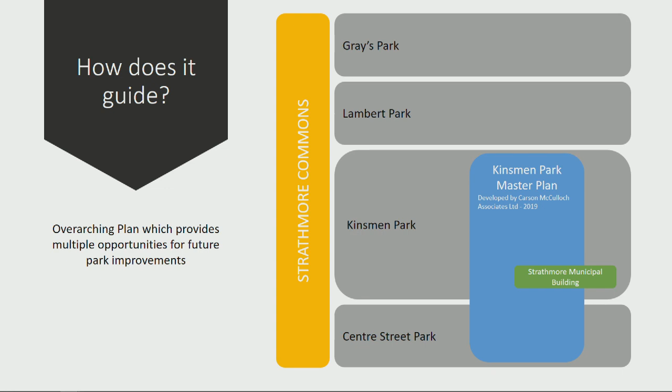So how does it guide us? This overall plan includes Grays Park, Lambert Park, Kinsmen Park, and for now we'll refer to it as Centre Street Park. Within that, we've done our Kinsmen Park Master Plan, completed earlier this year and late last year, which includes Kinsmen Park and what I refer to as Centre Street Park. A small portion of that is also our new municipal building, which is under construction.

So what we're looking to do through the rest of 2019 and 2020 is 5 different phases. One is the Thomas Drive pedestrian bridge. One is pathway projects related to Strathmore Commons. One is the transition zone between our new municipal building and the current park. One is enhancements to the playground in Kinsmen Park, and one is maintenance work or enhancements to the existing spray park.

The Thomas Drive pedestrian bridge - we've already got this item out for tender. We've used Lex 3 Engineering, who specialize in bridges, as well as Sedulous, who we've used on previous projects, to continue our relationship with the WID. This will be located at Thomas Drive and Centennial Drive. We already have the gravel pathway along the south side of our storm pond that goes right to that point, so we'll connect there.

In the next phase, we've got more pathways that'll go from this bridge further south. Construction is restricted to fall and winter of 2019, to align with WID requirements for working when there's no water in the canal. Tender closes tomorrow, and then we'll know where we sit related to our budget and what the cost will be.

For the pathways project, where this bridge will go on the west side of the canal, we'll do a pathway all the way down to Park Lane Drive. Another is the Lambert Park Pathway, which came from concerns from Lambert residents - they've had people cutting through their property to go towards the library, so they've asked for a formalized pathway to help reduce that concern. We've included for that.

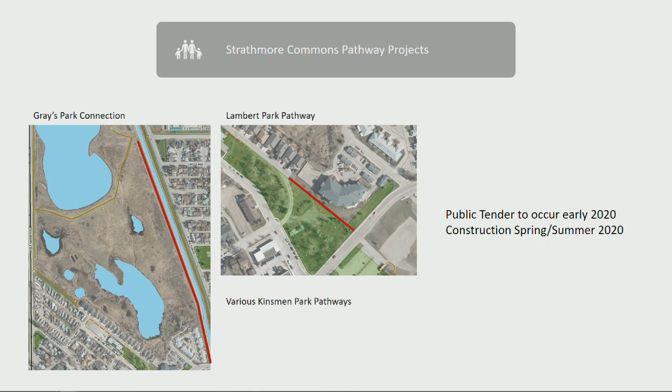Everything in the master plan is just that - it's a guiding document, not set in stone. We have the flexibility to change things, move locations if we see fit. This is just the recommendation.

Playground enhancements - we're going to coordinate this project with operations. They've got connections, they do enhancements to playgrounds every year, so they know the people to talk to and the rough cost of what it should be. We're going to look at a design build for this one, because it's a specialized thing and we might as well use the experts and their opinions.

This one will be constructed in 2020, but we're going to look to tender this as soon as possible to try and get the best price. Understanding from the operations department, the longer you wait, the less likelihood you are to get either competitive pricing or any pricing at all.

We haven't quite decided what to do here, but we are looking at possibly additional equipment, a new play surface, and some adjustments to the landscape around the playground.

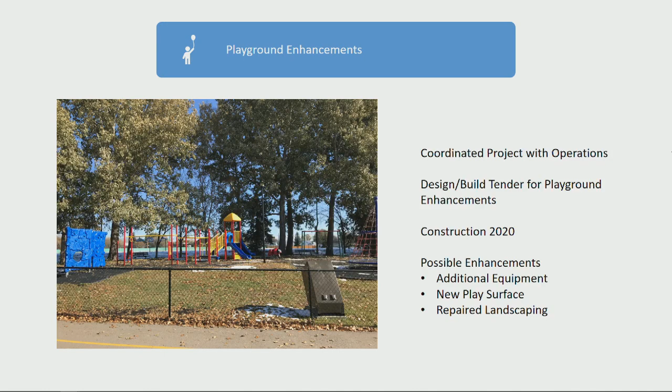And then the last one is the spray park maintenance - this again would be coordinated with operations. Our original thought was mechanical things, just get it working again. But the more we worked with operations, we understand it works good, it doesn't have issues. We don't need to spend the money to enhance it - that's part of their regular maintenance that doesn't need a big capital spend.

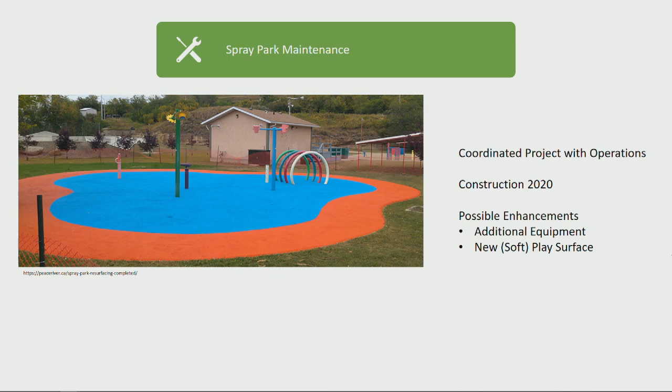So what we're looking at is either additional equipment or maybe a new soft play surface. The reason we're looking at the new soft play surface is there are options for grants - it's recycled rubber, that sort of thing. So anywhere we can get help or more funding, we're all for that.

To go along with this, of course, we've got risks. Main one being our budget - it's always a fixed item that cannot change. So as we get things tendered, we will work within our budget. We've got approximate costs for everything, but until we know hard costs, we'll work within that number.

Public disturbances - we know already with our municipal building there are concerns of residents. We're working in this area a lot, and we're also going to work in other areas. So keeping the public informed is a big one.

Contaminated soils - this is well known in the Kinsmen Park area because of what used to be there. So that does have a cost associated with it. We do have a good idea of what that will cost, but again, that's one where until you dig it up, you don't know.

Schedule - we are looking to get as much done as early as possible. The goal is to be done by fall 2020. So that is a very limited summer construction schedule, but we do have the opportunity to do a bunch of this stuff throughout the winter months.

And then the last risk is public expectations. We are a town, we are spending public money, so we want to make sure that we are getting good value, that we're diligent on what we're spending, and that we're meeting the expectations of the public.

Stakeholder engagement - so we do want to keep people informed, we want to keep people involved, and we're going to try and do this through different forms.

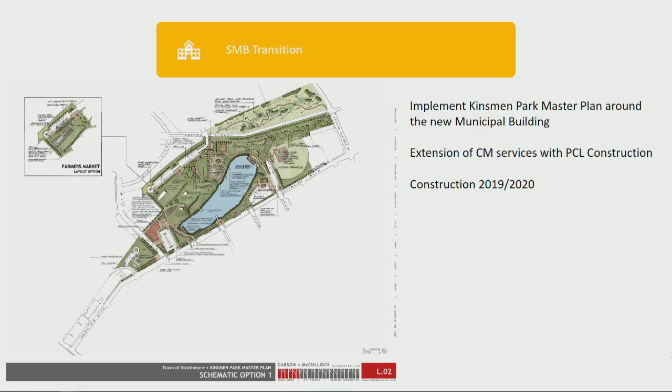Under the public expectations process, this is a public expectation. It was a public expectation when this council spent $175,000 on that farmer's market. The expectation of our community, and the people we entice downtown from their nice, warm, year-round area to come downtown and enhance it, just like the same reason for our municipal building, was that this would sooner rather than later become a closed-in building, with power and access to water.

So I think that is something you're going to get a lot of backlash from the community about. We are adding water, that is already planned, but the fact that you have an open-sided building is going to be a huge problem. And it was certainly at the time when we did that, and we were also talking about upgrades to the playground and spray park, a priority over both of those things. I don't know if council would agree with me or not, but that certainly was in my purview and my understanding when we enticed that group from the Ag Society. I wouldn't want them to think that was done under false pretense.

My other question is around council getting weekly updates, but what about our website? I know we've talked about that. Our mayor has been eloquent in speaking to the need for absolute visibility in terms of this project, timelines, updates, and financials, and having those available to the community.

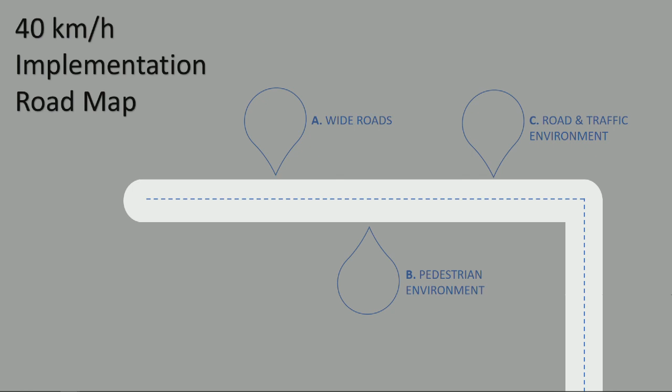From here, we looked at our 40-kilometer-an-hour implementation criteria. Step A deals with wide roads, B deals with the pedestrian environment, and C deals with the road and traffic environment. A states pavement width equal to or more than 10.5 meters, where the operating speed's 85th percentile is equal to or less than 50 kilometers an hour. The width along Centre Street is 12 meters, which meant we had to put up our armadillo, our traffic counting device.

We put that up for 7 days. It collected the speeds and how many cars drive along that road. Based on that, our 85th percentile along that road is 55 kilometers an hour. So looking at that, criteria A was not met. We continued on with criteria B, which deals with the pedestrian environment.

Is any school adjacent to the roadway? No, there is no school there. Is the road adjacent to parkland that has access to a school or park, recognized educational or recreation facility? Yes, it's right next to Kinsmen Park. Is there no sidewalk on either side of the road? There is sidewalk on both sides, so that was a no. Number two, is the sidewalk not separated from motor vehicle traffic by street parking or bike lanes, and is the traveled portion of the road width less than 5.7 meters? That one ended up being a yes as well.

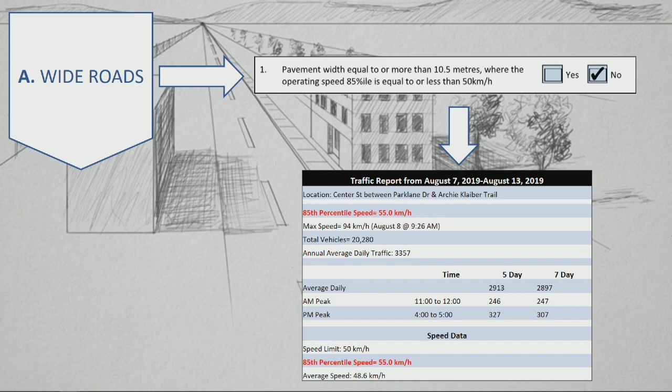But the average daily is dropped, that's my question. So from 4 o'clock to 5 o'clock, you're doing the 5 days, Monday to Friday. Okay, I understand now. Completely understand now, awesome, thank you. Thank you for the clarification, Kelsey and Michael. Councillor Sobel. Thank you, Your Worship.

I guess I'll start with a question. Are you aware of any collisions that have occurred on that roadway? Thank you, I am not.

I'd like to comment that the Traffic Advisory Committee has dealt a lot with roadway speeds, and feel they're focused on two decisions: do we change the speed of our non-arterial roads as a whole, down to 40 or 30 as done in some communities, or do we arrive at criteria to determine which roads should go to 40?

We had a pilot project on Cambridge Glen Drive and Centre Street north of Park Lane, and the criteria developed by Kelsey and Michael speaks well to determining those speeds. If I'm not mistaken, both those roads would still result in a 40-kilometer-an-hour zone. That is correct.

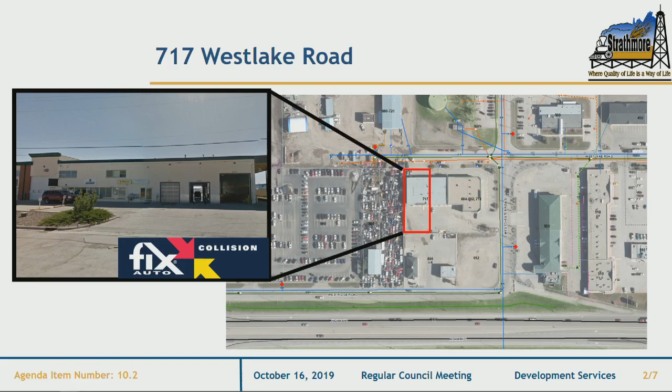Land use bylaw 1411 currently contains a definition for auto body and paint shops. However, the use is not listed in the commercial highway district. The proposed direct control will allow Fix Auto to provide services for vehicle collision repair, auto glass repair, and sales at this location, rather than having a portion of their services listed under auto body and paint shop - their repair and collision services - and another portion listed under automotive and equipment repair shops, which is the auto glass replacement. So this DC would allow them to do both of those things in this location under the previous commercial highway district.

Conditions have been added to ensure the site is well maintained and no vehicles would be parked on the street or cause issue. So we've added conditions such as keeping the service bay door closed except when being used by vehicles to exit or enter, and not keeping vehicles outside a building or screened enclosure for more than 72 consecutive hours.

The municipal development plan policies under section 2.3, economic development, and section 3.4, commercial development, both support the proposal, stating that the town shall promote Strathmore as a strong business center, search for new and innovative industries to relocate into the town, and encourage businesses that provide employment to reduce the need to commute. The policies also state the town shall seek to attract commercial developments to further substantiate Strathmore's place as a regional service center and provide employment and growth to the community, while encouraging revitalization and reuse of existing commercial properties.